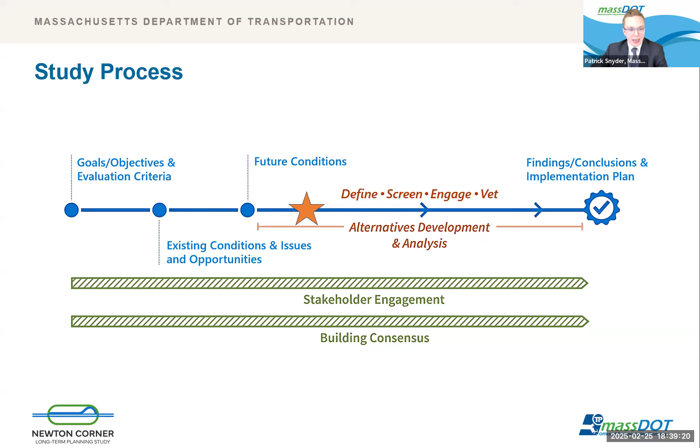I'm now going to hand it over to Matt Duranleau to review the future conditions analysis. Thank you, Christine. I'm Matt Duranleau with VHB, and I'm the mobility lead for this study. Tonight, I'm going to give a short summary on the future conditions analysis.

Prior to developing alternatives, we projected out to a future year of 2050 to understand mobility, environmental, and land use projections in the future if no alternatives are implemented. Utilizing a horizon year of 2050 does not mean changes will not be made until then. A timeline of possible implementation will be developed as the study progresses later in the year. While the study team conducted a thorough evaluation and analysis of existing conditions, tonight I'm just going to provide a high-level overview.

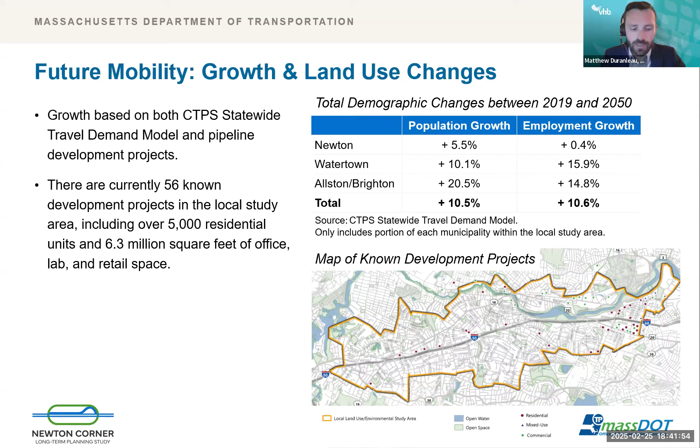We also coordinated with local municipalities and agencies to anticipate changes to the transit and roadway network. On the transit side, there are several improvements currently under development, such as the bus network redesign and the Newton commuter rail station's accessibility improvements.

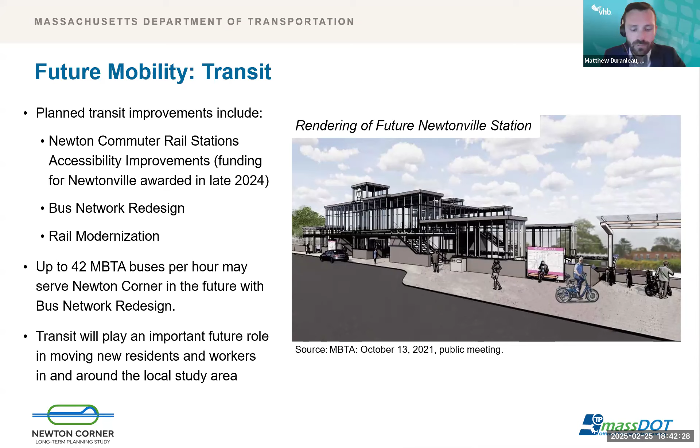As many of you are aware, funding for the Newtonville commuter rail station improvements was awarded late last year. We understand that transit will play an important role in moving residents and workers around the study area, and all of these transit improvements are incorporated into our 2050 future projections.

Our future projections also include proposed roadway infrastructure investments. There are currently several roadway improvements under development in the study area, including the Leo Birmingham Parkway reconstruction, the North Beacon Street at Soldiers Field Road roadway realignment, the Washington Street pilot in Newton, and the Watertown Square area plan in Watertown, to name a few.

A common theme we found in these proposed improvements is that they are primarily focused on improving safety and enhancing multimodal accommodations, as opposed to increasing vehicular capacity.

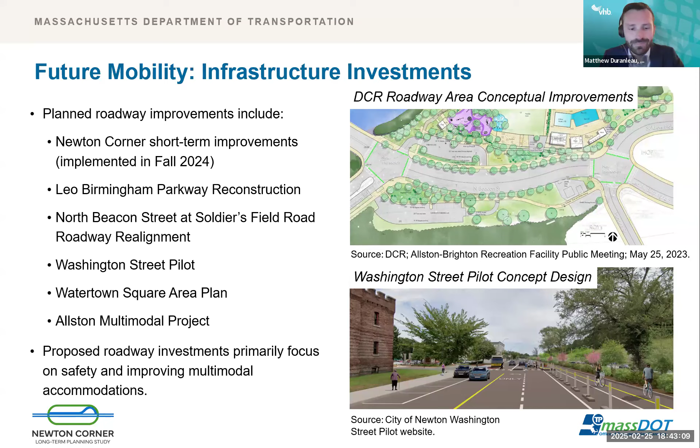On the active transportation side, we identified several new and proposed facilities for bicyclists, such as new infrastructure on North Beacon Street and Western Avenue in Brighton, on Mount Auburn Street in Watertown, and on Washington Street in Newton. Most of these new facilities will improve bicycle connections in the east-west direction.

However, based on the currently proposed improvements, there are still expected to be gaps in the future network in the north-south direction, including across I-90 and connecting to and from the Charles River pathways.

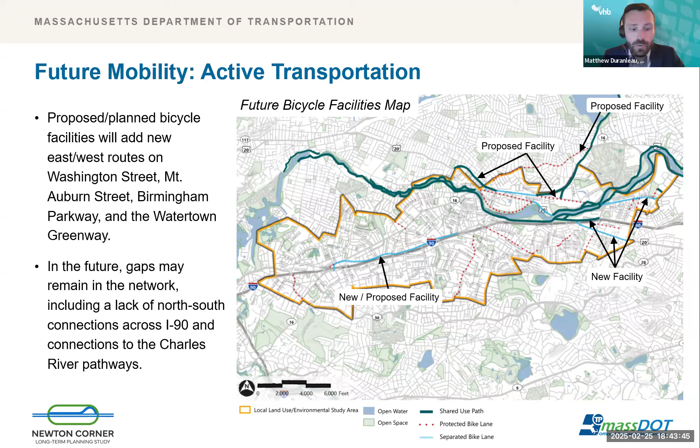With the proposed land use changes and known infrastructure improvements, we then reviewed the anticipated volume and ridership growth in the study area. Using the CTPS statewide travel demand model, which includes the known transit and roadway improvements I just talked about, and calibrating it based on known development projects, we found that transit ridership is expected to increase...

...by 12 to 28%, and vehicle volumes are expected to increase by 6 to 13% in the local study area by 2050. Transit ridership is anticipated to grow quicker than vehicle volumes due to improved transit infrastructure and limited capacity on the roadway network for additional demand.

However, the overall mode shares by 2050 are not expected to dramatically shift, as current network users are not anticipated to substantially alter their mode choices.

With the projected increase in vehicle volumes associated with the new residents and workers traveling through the study area, traffic operations in the local study area are expected to deteriorate by 2050. If left unaddressed, this growth will impact reliability, potentially leading to increased congestion or further extending the commuter peak periods.

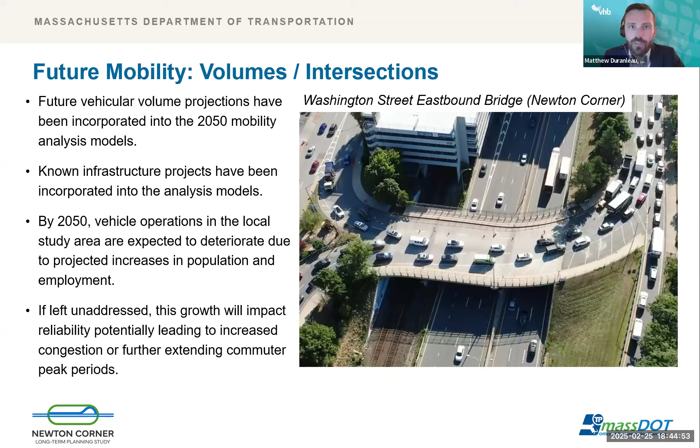The final future conditions element we want to highlight tonight are the future environmental considerations. The study area faces significant risks in the future from extreme temperature fluctuations, increased precipitation, and flooding along the Charles River. And by 2050, Massachusetts is expected to experience significant temperature increases. It is important to remember these environmental considerations as we progress into the alternatives development.

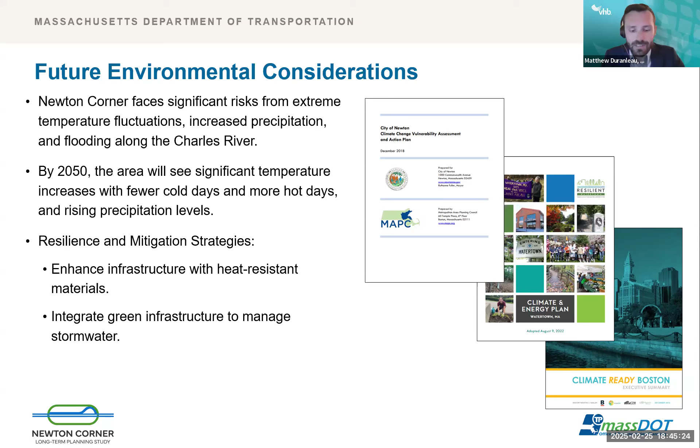And now I'll hand it back to Christine to talk about the issues, opportunities, and constraints. Thank you, Matt.

As part of this study process, we are looking at issues, opportunities, and constraints to flag as we dive into alternatives development. We began this process back in existing conditions and shared with you a snapshot of themes related to existing conditions back in October.

These were based on a review of our existing conditions data and analysis, previous studies completed, and input from our working group. We've since added, based on our future conditions evaluation and public comments received, including through our online mapping tool.

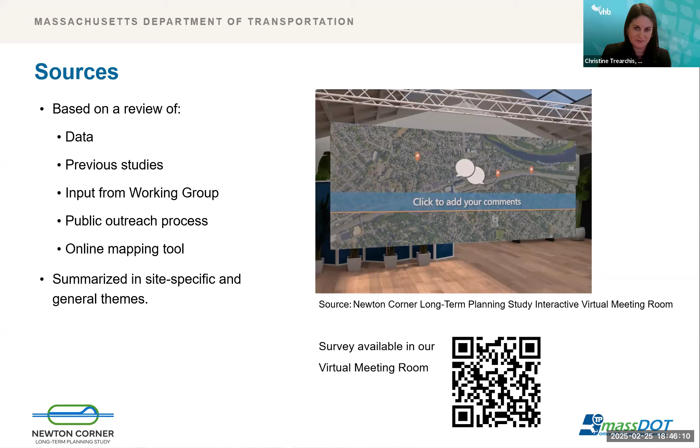Here's a summary of the issues, opportunities, and constraints. This is not a complete list, but rather a highlight of some key takeaways.

While we've already highlighted safety, there are persistent and well-known safety issues. Newton Corner is a high crash location with difficult merges and confusing travel patterns.

Like much of the Commonwealth, our study area is vulnerable to climate change and is anticipated to face temperature increases and flooding near the Charles River.

Many of the intersections within our study area have documented accessibility shortfalls that should be addressed through alternatives. There are opportunities to leverage the existing and potential future MBTA transit services in the area, providing clear connections to bus and commuter rail services.

Similarly, we have opportunities to help connect bicyclists and pedestrians to the existing Charles River pathways. While these connections are currently just a short bike or walk from Newton Corner, they are currently not very comfortable or very direct routes, leaving opportunities for improvement.

From an environmental standpoint, we have an opportunity to expand green infrastructure to help reduce heat island effect, improve public health, and manage stormwater. Our study area is also home to natural, historic, and archaeological resources to consider. The Charles River is nearby, and Newton neighborhoods are known for their historic character.

We've organized initial alternative ideas into 3 parts. The first is what we're calling supportive elements—these are elements that should be considered under all alternatives. Next are alternative components, which are individual components that can then be layered onto each other to develop full alternative packages. And finally, we have a few examples of how these could be layered together. We understand there are many different combinations, and these are just a few examples to spark conversation.

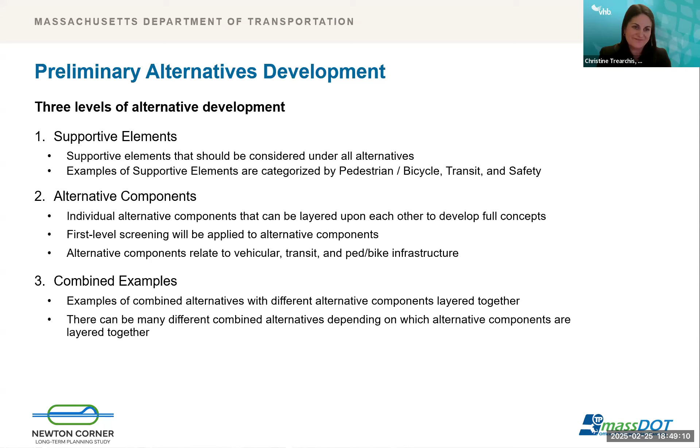First, I'm going to run through the supportive elements, and the first one is pedestrian and bicycle elements. Essentially, every alternative should be seeking to create new pedestrian and bike connections through Newton Corner, as well as to the existing Charles River pathways, seeking to develop on-road bicycle accommodations, but especially find opportunities for separated bicycle lanes. We've also included placemaking here, creating an inviting pedestrian environment that makes Newton Corner feel like more of a destination.

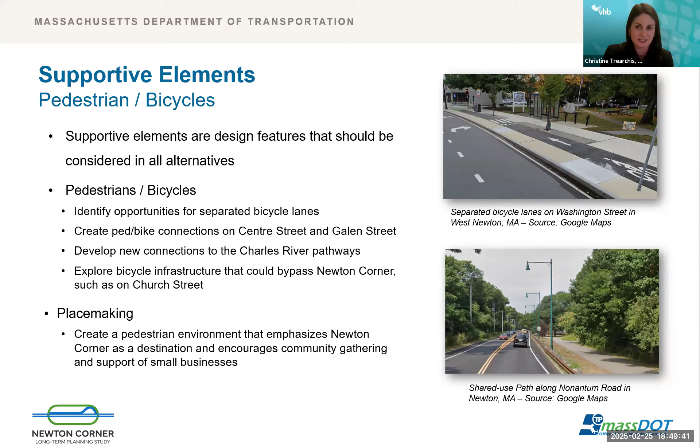Next are transit elements. These are aimed at finding opportunities to incorporate transit signal priority, enhancing connections to existing services, such as the buses and the Newtonville station that will be going through upcoming improvements.

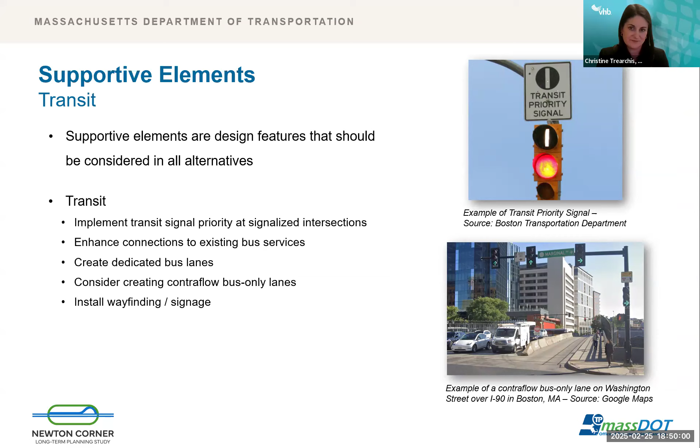Finally, are safety elements. These include trying to provide conventional and straightforward intersections for motorists, including evaluating where roundabouts may be appropriate to reduce conflict points, as well as adding fully accessible pedestrian accommodations and improving lighting. Now I will hand it over to Matt to discuss the alternative components.

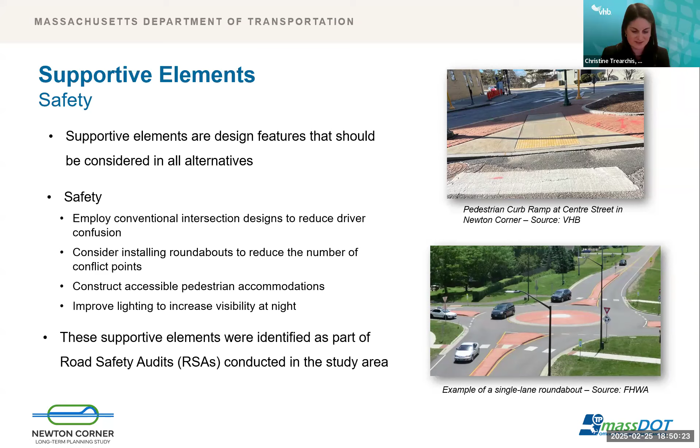Thank you, Christine. Today, as Christine said, we have 16 different potential alternative components that we're going to touch upon. These represent an initial list we developed based on previous feedback we've received, and we anticipate that additional components may be considered based on feedback from the public tonight. These individual alternative components can be layered upon each other to develop full concepts that will be presented at the next meeting. And as Christine mentioned, she'll present 3 potential examples after this, after I go through these components.

As I go through each component, I know it might be a little difficult to fully digest everything that I'm about to present. Right now, I just want to introduce each of these components, and then we can dig into them a little deeper in the breakout rooms where all of the slides will be available.

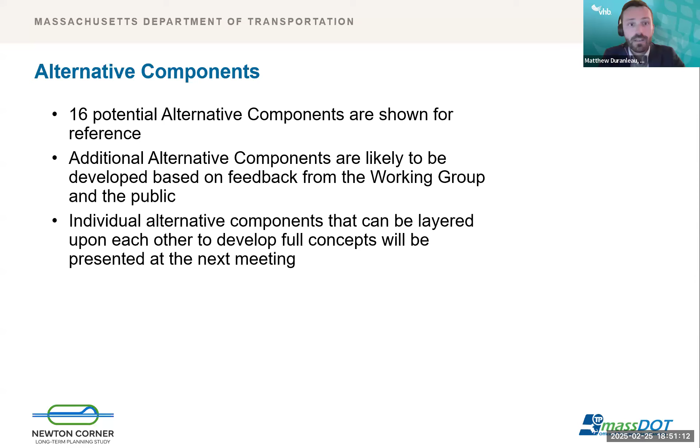So getting into it, our first alternative component is looking at two-directional travel in Newton Corner. To minimize weaving and increase safety, this would allow bi-directional vehicle travel on roadways in Newton Corner, such as on Washington Street, north and south of I-90, and on the bridges over I-90. This is an idea we've heard in the past from the public, and it's likely that this component will be incorporated into future full concepts, either on one roadway segment or on multiple roadway segments.

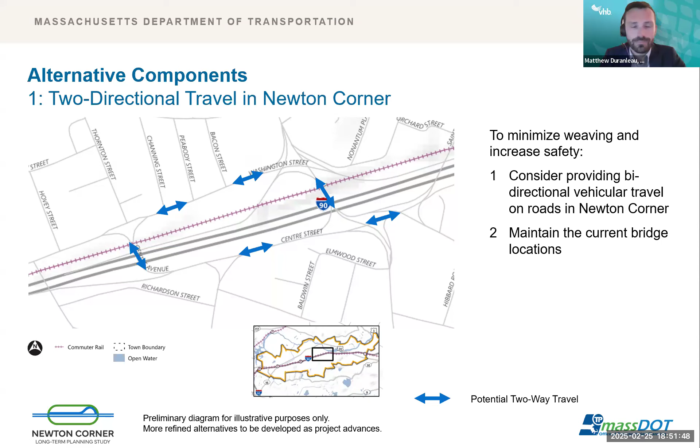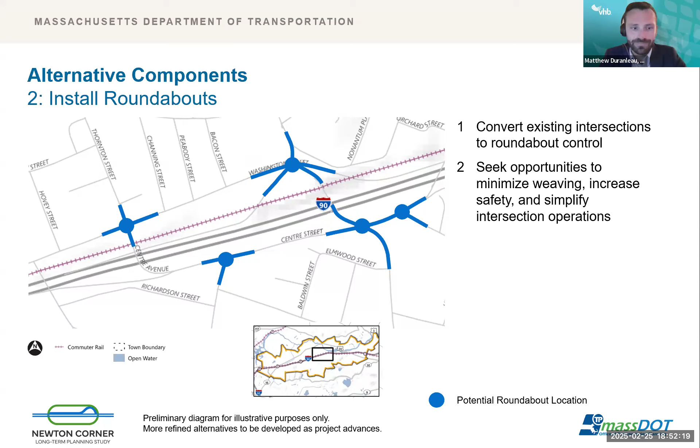Moving on to the next one, this component would be a new bridge connecting Centre Street south of I-90 with Centre Street north of I-90. This would restore the historic roadway network of Newton Corner before the interstate was constructed, allowing continuous through traffic on Centre Street. A new bridge at this location could provide bi-directional travel for vehicles, pedestrians, and bicyclists, and would help to simplify overall operations.

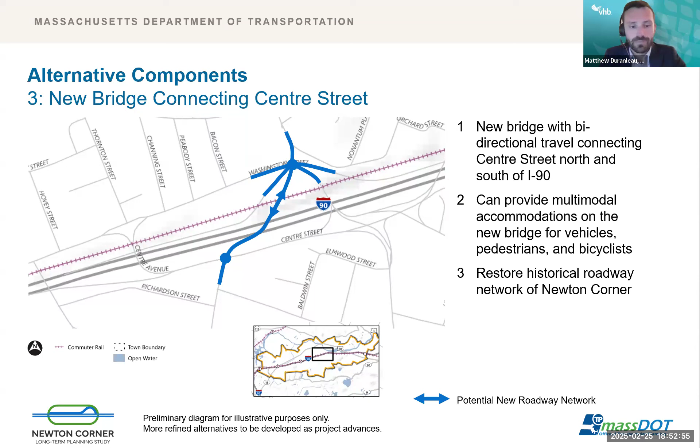Component 4 would close the existing I-90 westbound on-ramp and relocate it to a new location west of Newton Corner. Moving the ramp would simplify operations at the current intersection. However, we will need to evaluate the feasibility of a new interstate location west of the current location and understand how that would tie into the roadway network.

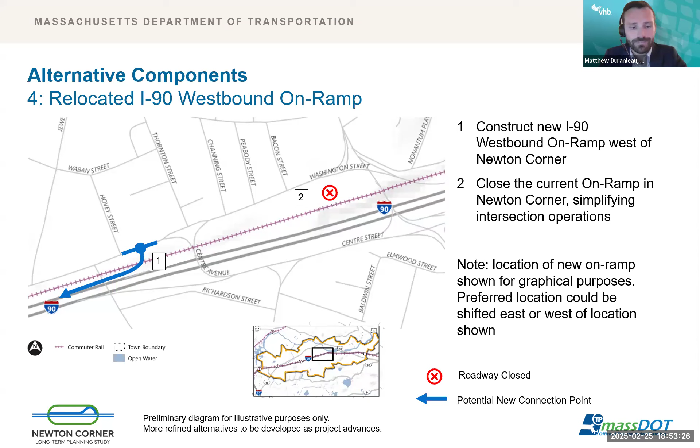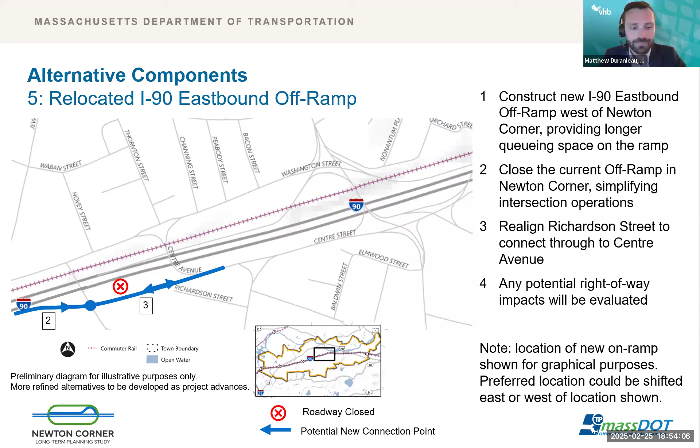The next few components look at enhancing transit accommodations in Newton Corner. This component looks at repurposing the existing Washington Street westbound bridge as a dedicated transitway. I know this alternative needs a little more detailed explaining.

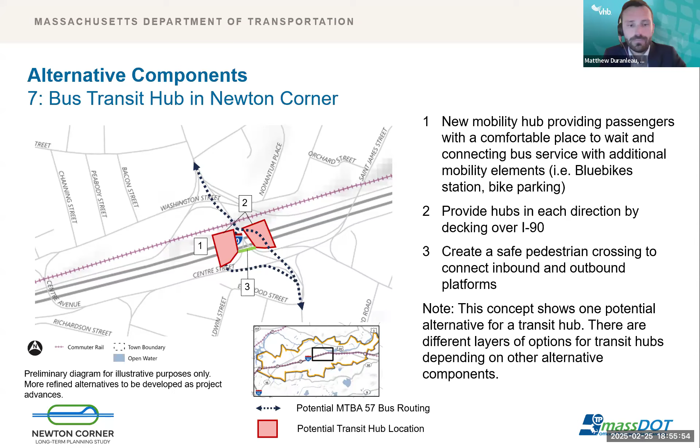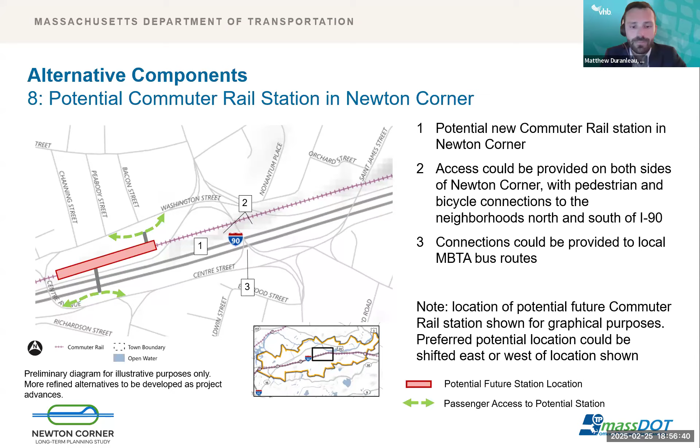This next component involves decking over I-90. There's potential to use decking to provide space for multimodal uses, bike paths, transit bus stops, mobility hubs, additional green space, and/or community space. Decking could also help create a village center in Newton Corner and provide a more welcoming environment for small businesses.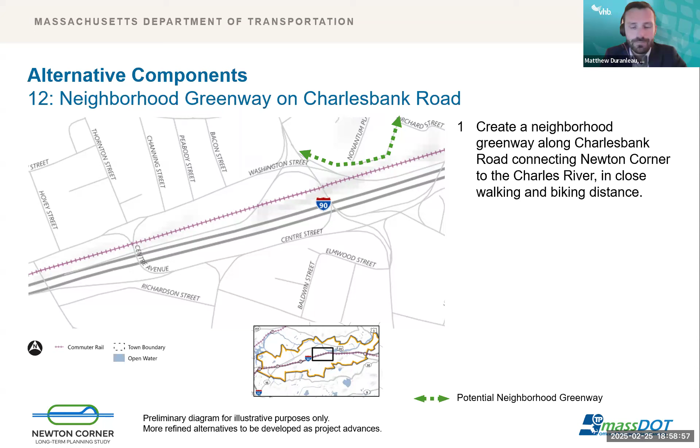Another potential way to connect to the Charles River pathways could be a shared use path on St. James Street. This would likely require converting St. James Street to one-way for vehicular travel, to provide space for the shared use path for pedestrians and bicyclists, but it would provide a direct connection from the south side of I-90 to the north side for peds and bikes. This shared use path could either follow Charlesbank Road to Nonantum Road, as vehicular traffic does today, or follow a new connection to Nonantum Road along St. James Terrace, as shown in number 3 on the graphic.

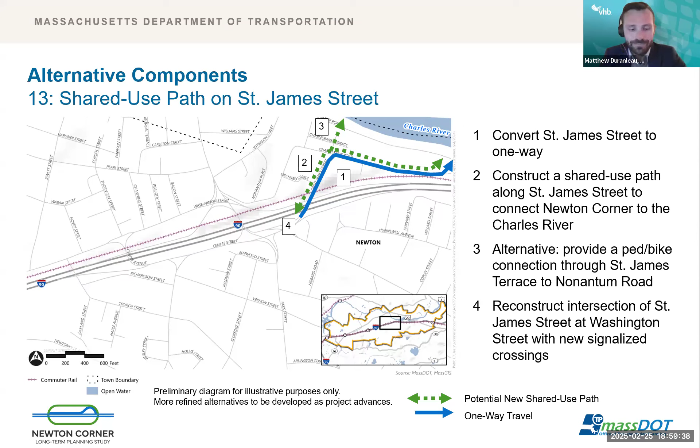This next alternative component looks at creating a dedicated pedestrian bicycle bridge that would connect Newton Corner to the Charles River along I-90 and along the train tracks. The distance of this bridge would be approximately one-third of a mile. If this alternative were to progress, the study team will need to evaluate the feasibility of constructing a bridge in this location, as there is quite a grade difference leading down to the Charles River.

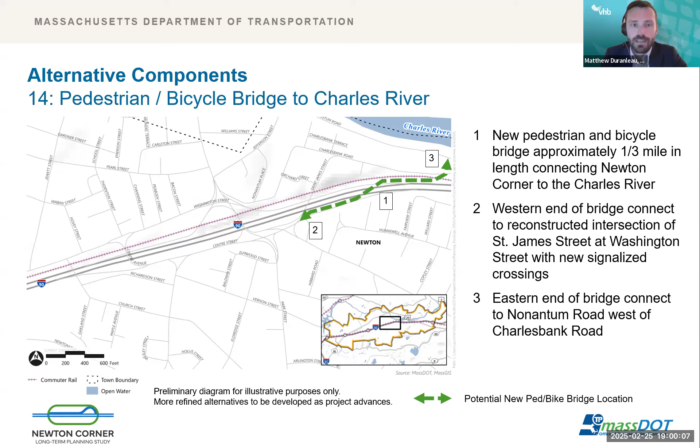Only a couple more to show. Looking beyond Newton Corner, this next alternative component would construct full interstate access at West Newton with a new eastbound off-ramp and a westbound on-ramp. This would provide additional access from the west on I-90, and relieve reliance on the Newton Corner interchange. If this alternative were to progress, the study team will need to evaluate constructability and the potential right-of-way implications.

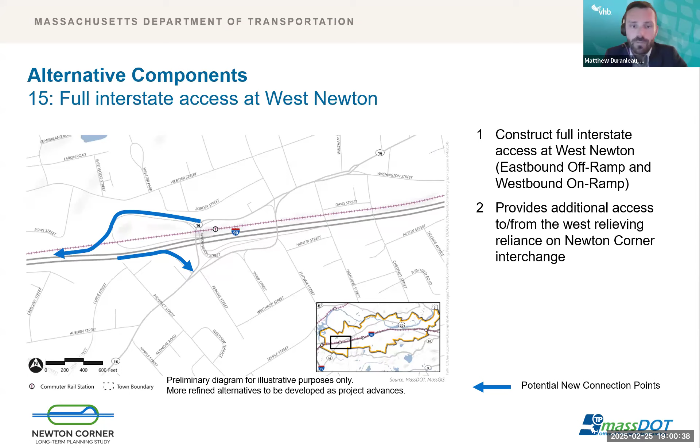And now the final one I'm going to talk about tonight: full interstate access in Brighton in the DCR roadway area. This has been included in previous planning studies for Newton Corner, and it could include full or partial interstate access in this general area. However, there would likely be constructability issues and potential impact to DCR property, including protected parkland.

Now that we've talked a lot about the different individual components, I'm going to hand it back over to Christine to show some potential ways that we can combine these all together.

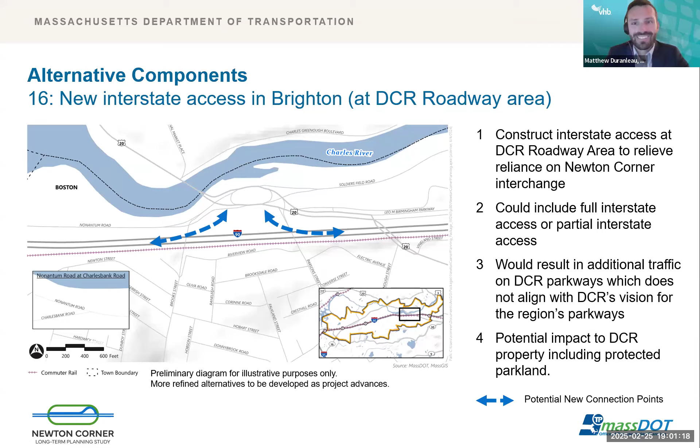Thank you, Matt. Now, as Matt mentioned, I'm going to provide some examples of how we could combine these components. I want to reiterate that these are just three examples of seemingly endless possibilities, but we wanted to develop a few examples to spark conversation this evening. We're really interested in your feedback during our breakout rooms on these, as well as any additional ideas or suggestions you have.

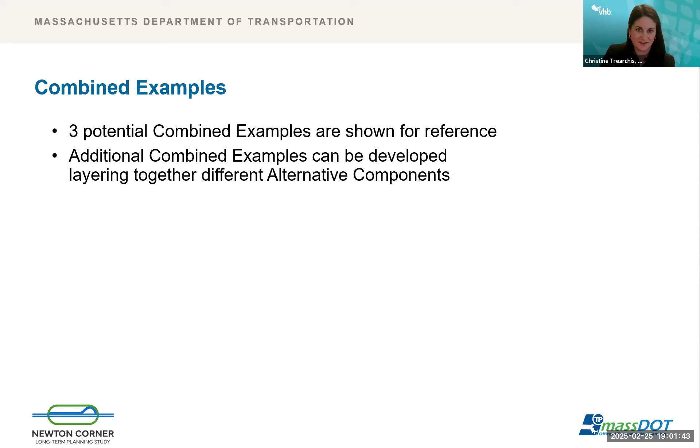The first combined alternative example really utilizes the existing infrastructure and right-of-way, but considers two-directional travel on all roadways. This would maintain the existing bridge locations, but look to simplify movements, minimize weaving, and improve safety. As an added layer, we could also consider reallocating right-of-way to accommodate non-vehicular modes as well.

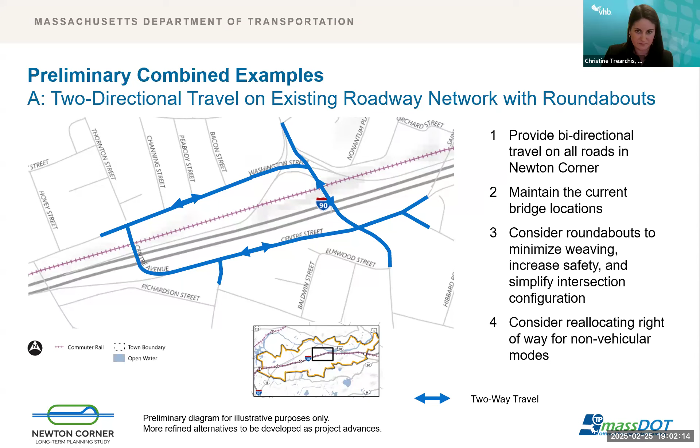Another added way to achieve enhanced pedestrian and bicycle accommodations would be to utilize Charlesbank Road as a neighborhood greenway connecting to the Charles River and Nonantum Road.

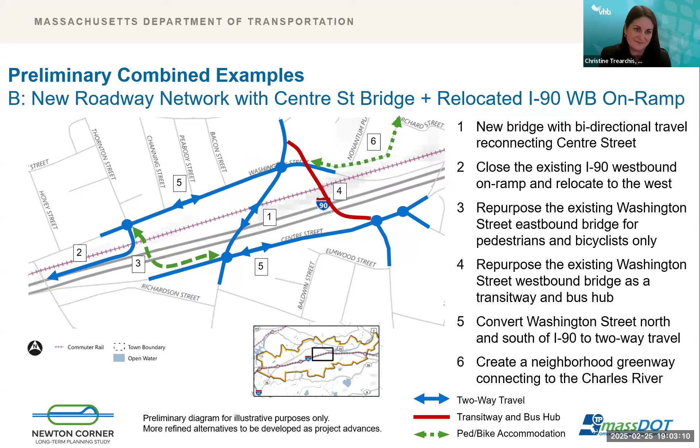Our final example provides that same new bridge connection north-south, reconnecting Centre Street, and has also been combined with relocating the westbound on-ramp in order to again simplify that intersection in the northeast quadrant. In this instance, we've then layered on a commuter rail station on the north side of I-90, as well as repurposing the westbound Washington Street Bridge into a transit way for buses.

This also includes considering 2-directional travel on Washington Street, both north and south of I-90. And in an effort to achieve enhanced pedestrian and bicycle accommodations, this option provides decking over I-90 for a shared use path and green space, as well as utilizing St. James Ave for a shared use path connecting over to Charles River and Nonantum Road.